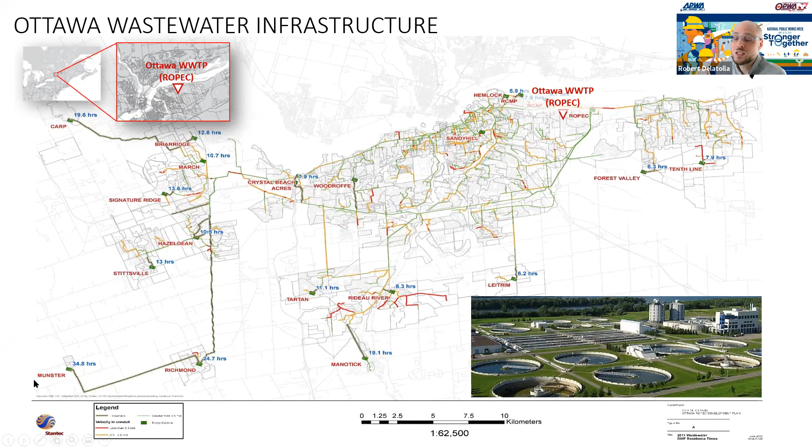Ottawa is about 1 million people. About 910,000 of that million are connected to the sewer system, with all of that wastewater flowing to one central wastewater treatment plant. So one sample from that plant allows us to get an idea of the signal of COVID in the wastewater for about 910,000 people. Still quite effective in that regard.

When we started this project, we had no idea if we'd be able to detect COVID, the virion or the genetic code of the virion, within the wastewater. So we looked at 5 different locations within the treatment system. We took 3 of those locations and fractionated them into suspended solids, filtered solids, and filtrate, trying to figure out exactly where we could find the signal of the virus.

We eventually figured out that the viral signal that's fecally shed ends up partitioning to the primary sludge. That's where we ended up looking for the virus within the wastewater treatment plant.

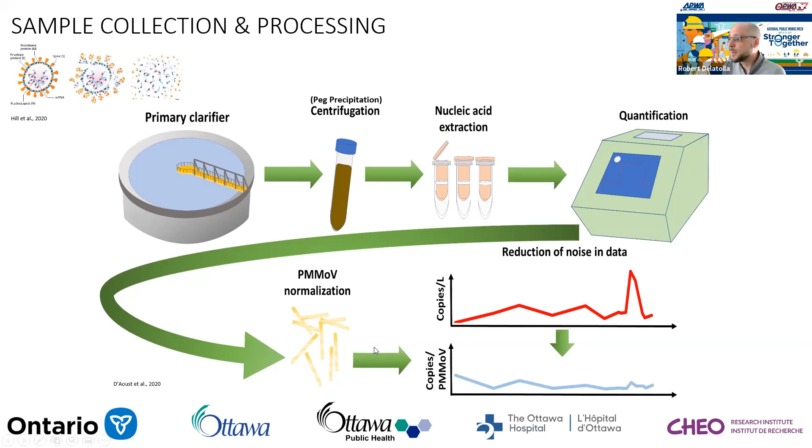Back in April and May 2020, during those early days in the pandemic here in Ottawa, there wasn't a whole lot of testing rolled out yet. So the number of new daily cases, the metric we're used to seeing on the news, wasn't very reliable because there simply wasn't enough testing going on. At that time, the public health unit was leaning on percent positivity, so that's what I have graphed here for you today.

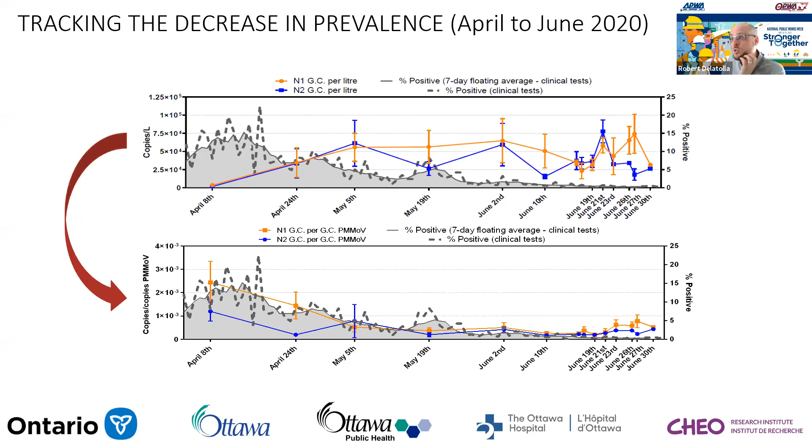But we only saw the clinical case numbers really increase on July 19th, two days later. So we started to learn at that point that this is our first indicator that wastewater testing might be an early detection system compared to clinical testing. Everybody fecally sheds, people don't have to go get tested, it's an involuntary deposit, and ultimately you could fecally shed before you really start feeling sick and think, okay, maybe I should go get tested.

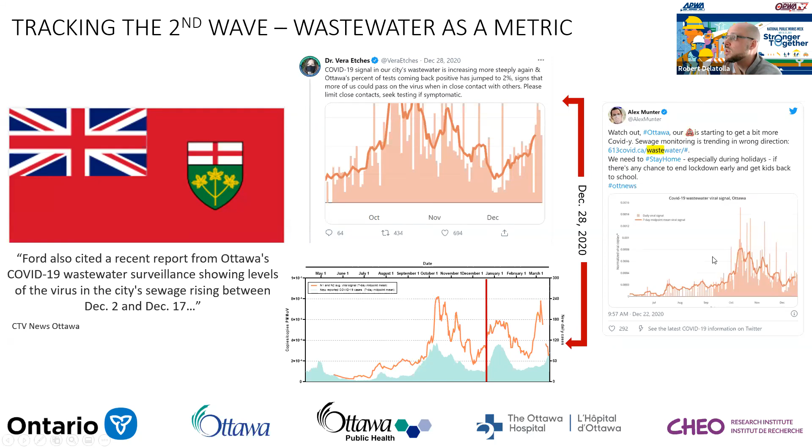The wastewater data has also been used quite a bit by Vera Etches and her team. Vera is fantastic, we're so grateful for her in Ottawa. She's the lead medical officer in Ottawa. Here's a tweet of hers asking for restraint from the public and showing the wastewater data increasing. Alex Munter, the CEO of CHEO, is also seen here tweeting the wastewater data, showing it going up and asking people to be cautious in their activities.

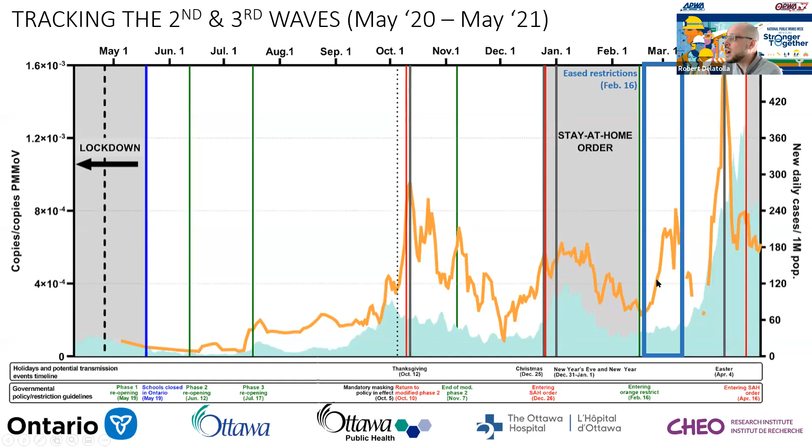A third example of when wastewater was used for public health is more recently, from end of February to March. And again it's the same story: the clinical test data wasn't really ramping up, the number of new cases per day, while the wastewater was really rising. Once again that data was used by Vera Etches and Ottawa Public Health to ask for increased social distancing and to inform the public that maybe there is more transmission, more community spread. Ottawa Public Health has a great Twitter feed, and they were asking people to be diligent given the increase in the wastewater at that point too.

One other aspect of our work here in Ottawa is that we were fortunate to work with Ottawa Public Health and be able to put that information online. They've been very generous to inform the public and show that data, linked to 613covid.ca - you could go check that out. There's somewhere between 1,000 to 2,000 views a day of the wastewater data in Ottawa, and it's being viewed all over the world, which we think is great. It helps promote and push the science, but also inform people about what's happening within the community.

Since we've been working on this project for over a year, we've also moved beyond just the wastewater treatment plant in Ottawa. We're testing 3 specific communities in Ottawa, and we're testing 2 locations at the University of Ottawa campus, in order to disseminate information and try to catch trends within certain hotspots, particularly within the community.

Another point we've been working on is the variants. We're hearing so much about the variants of concern, and this is very concerning. The first variant of concern we worked on was B117, the UK variant. We were fortunate in Ottawa and at CHEO to actually develop the assay to measure B117 within the wastewater, and that assay is now being used all throughout Canada.

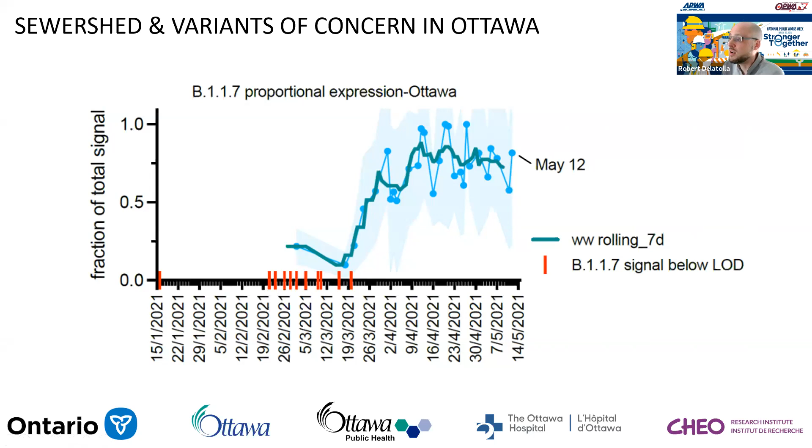So with that, I just want to thank OPWA one more time for the opportunity to come and speak with everybody today, and again to thank our partners. This is really collaborative work - because of the City of Ottawa, their whole team at the wastewater treatment plant, everybody on the sewer team, and also public health. Thanks also to the province, which came in January and funded this project, bringing $12.2 million through the MECP to fund this all across Ontario.

So I think hopefully you'll hear more and more about wastewater testing. There are now 13 different universities doing this, and we're doing over 120 different sites. So very happy, and hopefully it's going to make a difference and build a tool that will help keep us healthier and safer in the future. So thanks again.

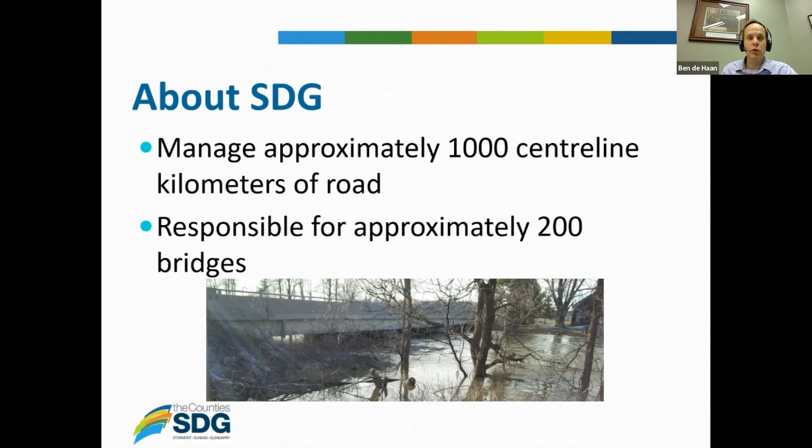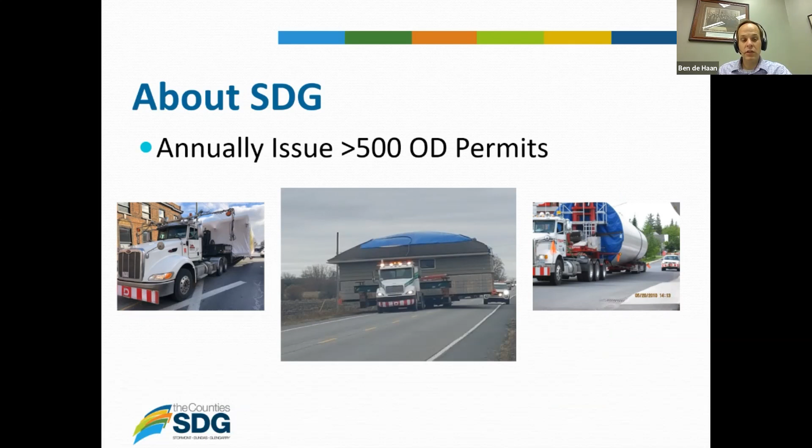As Arup mentioned, the county manages about 1,000 centerline kilometers of roads. We have about 200 bridges. And one of the big parts of our job is issuing permits. We issue about 500 over-dimensional permits, so that's anything above and beyond the requirements or what's allowed in the Highway Traffic Act. That just goes to show you that safely and efficiently moving goods is a big part of the service we provide to the people using our roads.

So about me, I'm the county engineer. I've been the county engineer since 2009. That's me doing some multitasking at my desk.

My claim to fame, according to the editorials in the newspapers, is I'm the roundabout king, because since my time here, we've implemented several roundabout projects, 3 to date, with a 4th one, which is out to tender right now. So for all the contractors listening in, I'd encourage you to go on Biddingo and take a look at that project. We'd love to get a bunch of bids for construction this summer.

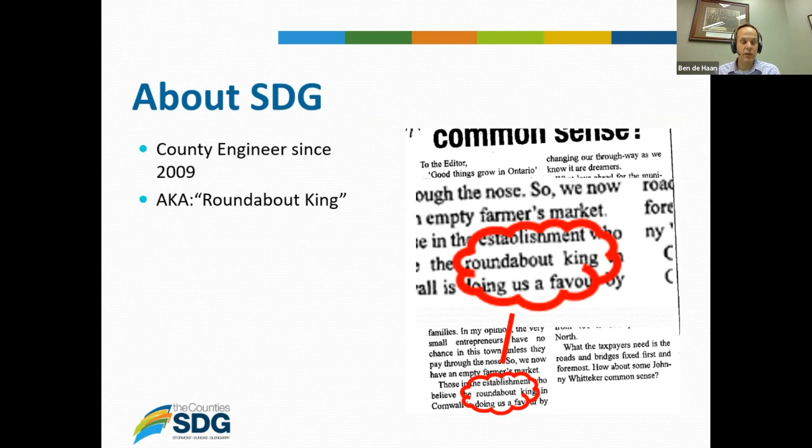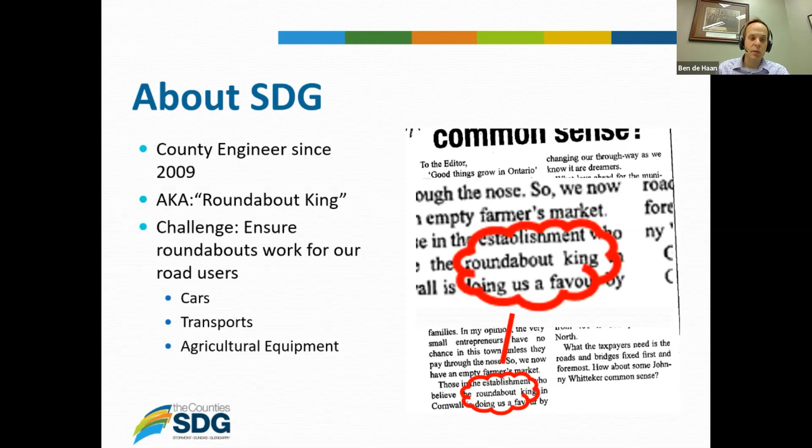We've been converting conventional signalized intersections, or intersections of concern, to roundabouts for various reasons, and that's really what I'm going to be discussing today. The challenge we've faced in doing that work is making sure those roundabouts work for all of our road users. So in the design, we're talking about the cars that use it, the commercial equipment that uses it, the occasional agricultural equipment, as well as the cyclists and pedestrians and other users.

The first project I want to talk about is the Iroquois Roundabout, and this is the first roundabout that was constructed here in SDG. The site itself, this slide gives you an overview of the project. It was located at the intersection of County Road 1 and County Road 2. We have about 15% truck traffic going through this intersection, so it's a higher amount of truck traffic.

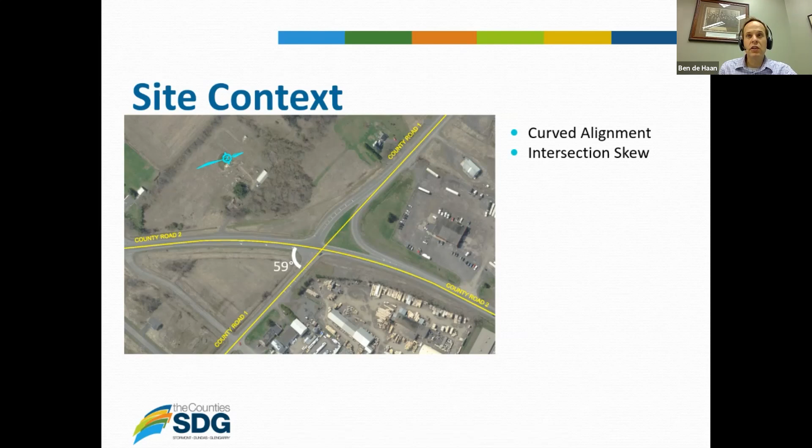The intersection itself, you can see County Road 2 is on a curved alignment, and that was why we actually looked at this intersection for a roundabout. We had a high incidence of accidents as a result of that curved alignment and some of the geometry and visibility there. The intersection was slightly skewed as well, approximately 59 degrees.

You could see that on County Road 1, we had tried to do some realignment to try and square it up a little bit better. County Road 2 is a through road here, and County Road 1 was stop controlled prior to the implementation of the intersection. We had sufficient right of way, so we were lucky in that respect. We didn't have to worry about property acquisition because of the large nature of the property.

But we did have some utility constraints. There were some high voltage wires there, but fortunately, the way the design panned out, we didn't have to do any relocation of that. One of the big considerations here, of course, is the truck traffic and the high percentage of trucks going through this intersection — we had quite a bit of heavy vehicle generation in and around this area. There was a logistics company located in the northeast corner, and a manufacturing company and feed mill in the southeast corner, so a lot of trucks were coming from those sites.

And if you travel on County Road 2 westerly, it goes towards Cardinal, and there's a large corn starch manufacturing company there.

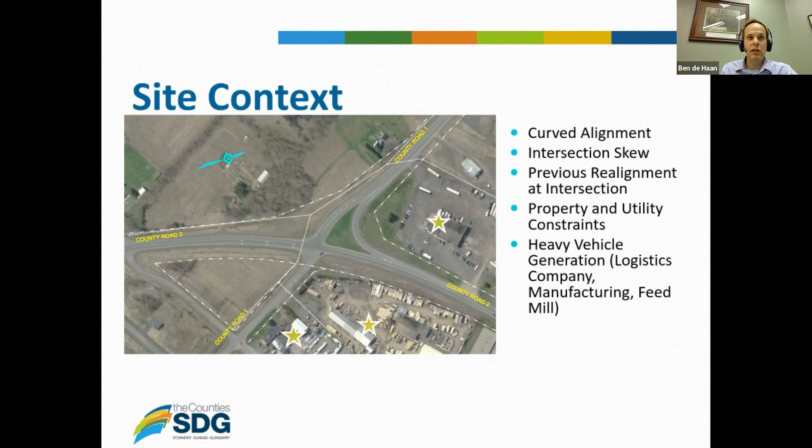A lot of trucks would come off of Highway 401, located just north of the intersection, and use County Road 2 to get to that location. Of course, the impact of the skew of the intersection has a big impact on how trucks can navigate it, and how Robinson approached their design.

When you look at a skewed intersection, that right-hand turn in that skew is the big problem. It really requires a turn path that's 40% wider than you'd need in a normal conventional intersection. So to accommodate that, designers would look at things like widening out your entry and those kinds of approaches. But we were concerned that doing so would create other safety issues. If you had that much asphalt to cover that whole turn path, you'd end up with a roundabout and an entry that looked like a 2-lane entry, and we certainly didn't want that.

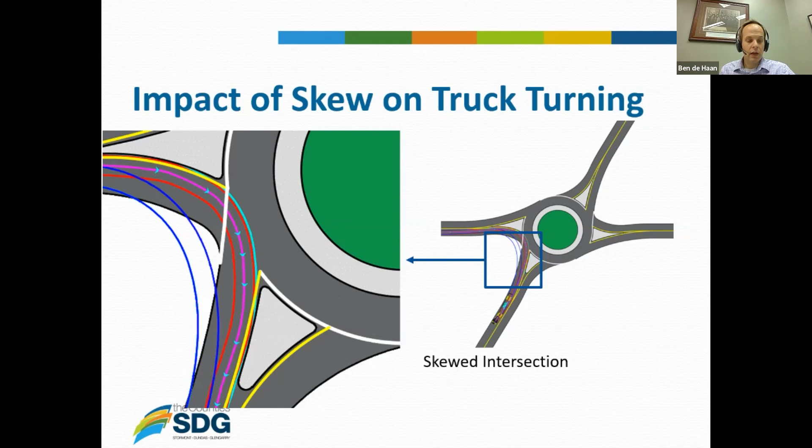So to Robinson's credit, they came up with a very elegant solution, which was to implement external aprons on this roundabout. You can see in the conceptual sketch as we were developing this design, those gray shaded areas are the external aprons that we thought would function as a way to accommodate the trucks without sacrificing the paved entry lane. The combination of the two is what trucks could use to actually navigate that intersection, because the predominant turn off of County Road 2 was both north and south in those directions. We wanted to make sure we could accommodate it, and that's what our design ended up with.

You can see in the design drawing for the intersection, the southwest and northeast corner, the final design for those tapers. Really those tapers were customized based on the turn paths using turning templates. Those kinds of tools were very useful and proved to be very useful as the design progressed.

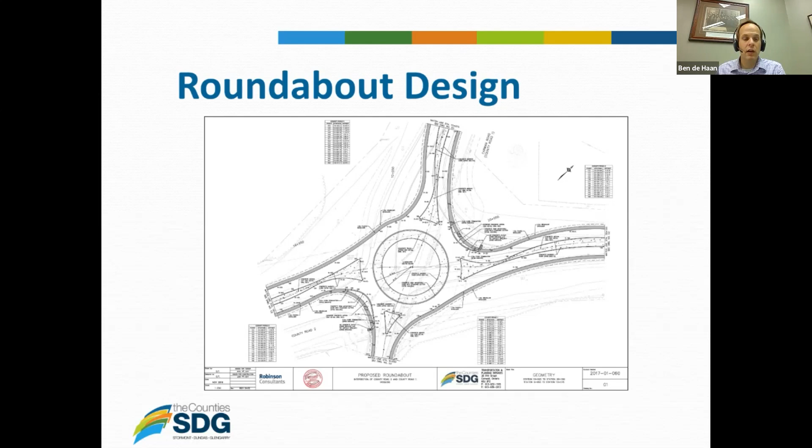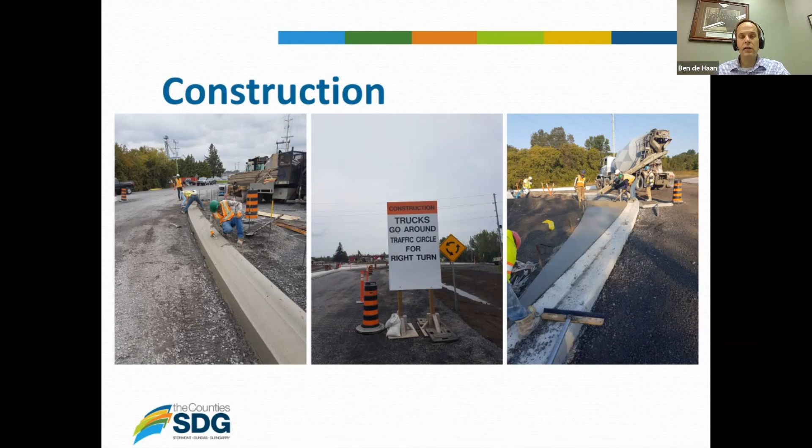It was finished in August 2017, and this is an aerial view of the intersection at a cost of about $1.2 million. I love this shot because you can really get a good feel for those aprons that were constructed as part of it and how they really blend into the overall finished product.

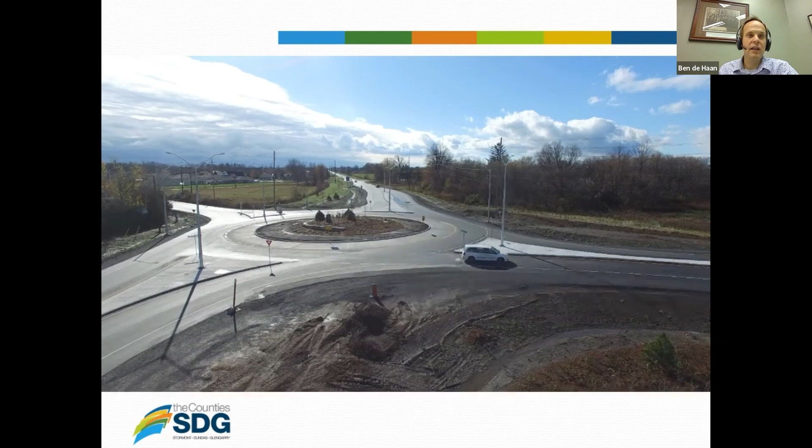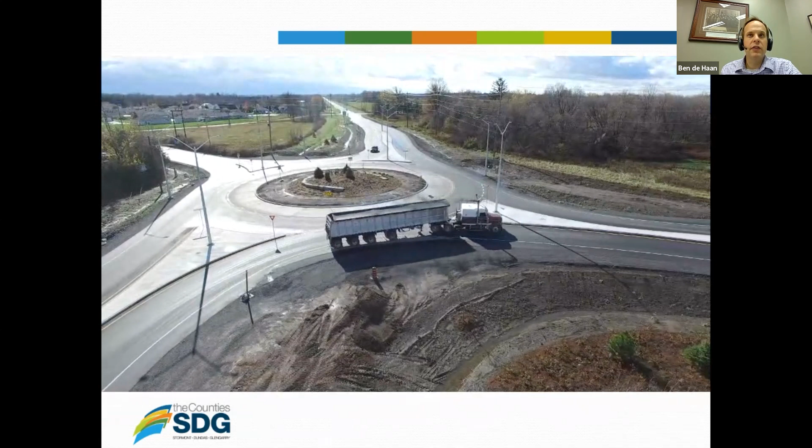While I was out there with the drone that day, I was lucky enough to capture a truck approaching the intersection. So here's how it actually ends up functioning. You can see the truck slows down enough to make a safe entry, makes full use of that apron, and continues on their way without needing to stop or create a very sharp turn. You can see how it helps.

At the end of the day, I do want to give credit to Robinson again - they won an award of excellence because of this design, a very prestigious award through the Consulting Engineers of Ontario. We were proud to be a part of this project.

The next project I want to talk about is in Long Sault, a little bit more in the south central part of the county along the St. Lawrence River. In Long Sault, we again had County Road 2, but a different design context - it's really right in the middle of the village, with separation between the village and the waterfront of the St. Lawrence River, and high potential for future development along the south end. County Road 2 was controlled by traffic signals at County Road 35.

At County Road 36, it was a stop control onto County Road 2, with residential, recreational, and institutional uses that are on County Road 36 or accessed through County Road 36.

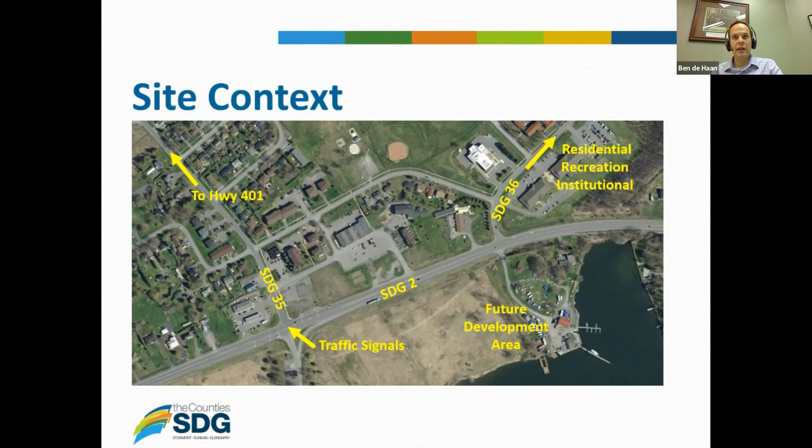Some site photos just to show you what the intersection and the road look like. You can see it's a very much County Road 2, which was a former highway, and it was a vehicular centric design back in the day. That was the main route between Montreal and Toronto, so much wider and more robust design than it needed to be based on the traffic counts. We have about 10% truck traffic there.

Whenever we were starting this project, we were approaching the end of the service life for the curbs and medians, and we took a look at the overall approach for this project and what it means for the community. That's why we landed on redoing the cross section to a more urban design that incorporated separated medians to help with traffic calming and implementation of roundabouts. So it was more a community centric approach to why we wanted to do this at the end of the service life, rather than a safety concern.

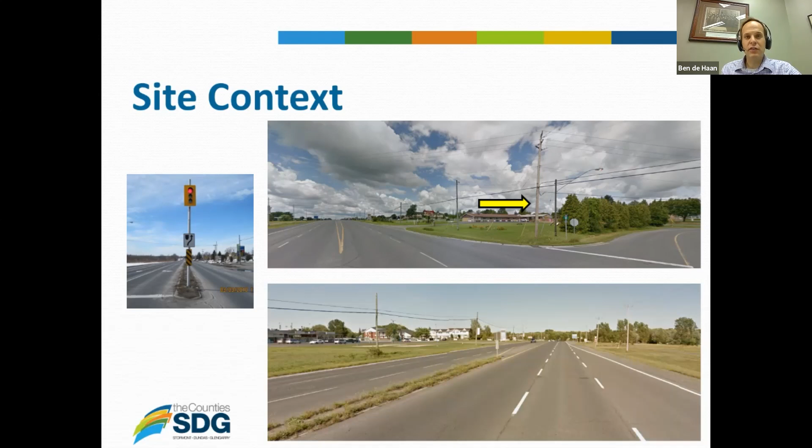I do want to point out, just for context as well, this pole here. This pole was the bane of my existence through this whole project, so anytime I can vent about it, I try to do that.

The design itself is very conventional. We made sure we had the separated medians and a lot of landscaping elements. Trucks and commercial traffic were designed for and thought about throughout, as well as pedestrians and cyclists.

Yeah, and I do want to point out that's where the pole was in the final design. We knew that it was going to be a problem for us, which is why we pre-consulted with the electrical authority well in advance of the work, with the intention of making sure it was relocated before we started.

One nice thing with the design of these intersections and roundabouts is the predominant truck movement was north to south. We have access to the 401 at County Road 35, going north from this intersection. And County Road 2 is an EDR, an emergency detour route for the 401.

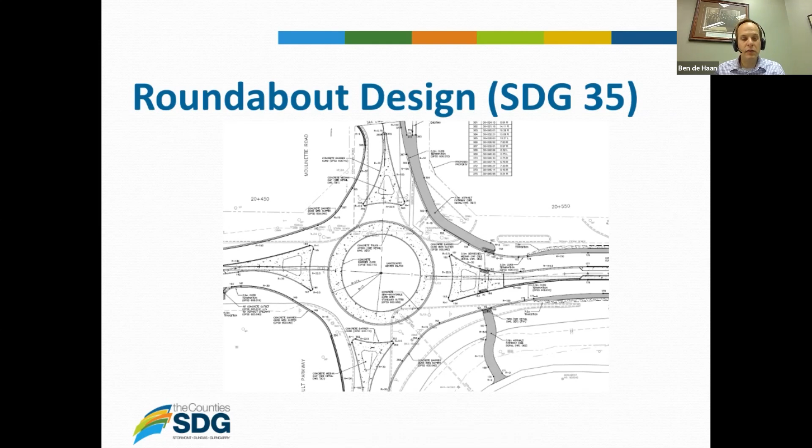But as the design progressed, we confirmed our truck turns through all the quadrants. It was checked, all the movements were checked with templates. And again, we shared some of those lessons learned from Iroquois on how to stage it to make it less painful for traffic to move through it.

Construction started after the long weekend, and Cornwall Gravel was our contractor here. We were able to maintain two lanes of traffic throughout the whole project, which is one of the benefits of that large platform I showed you in the existing drawings, since that large existing roadway platform gave us a lot of flexibility. We reused what we could, so a lot of the storm infrastructure, some recycling of asphalt, and our price for this project was $2.2 million.

Of course, every construction project comes with challenges, and here's an aerial view of a 401 detour because of an accident, with our contractor having to work with 401 traffic operating through the middle of their construction zone. That was certainly a challenge.

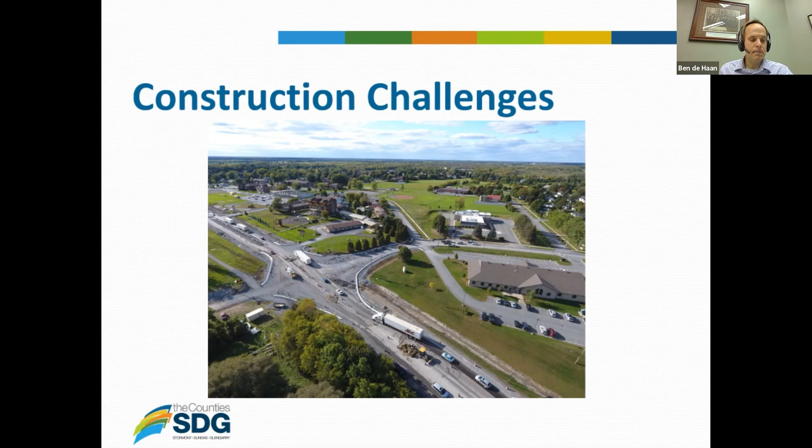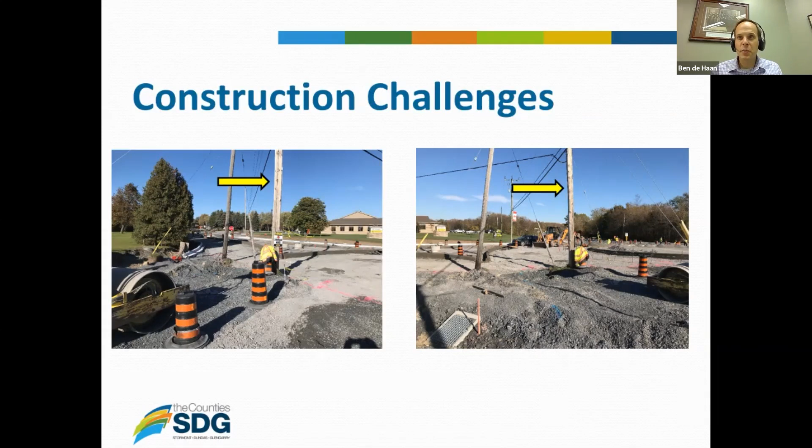And I know I mentioned this stinking hydro pole. Here it is again. You can see how it's right in the way of the work and still in our way. Fortunately, we were able to get it out of the way just before we opened, but it did require us to detour onto local roadways since it was a problem for us in finishing the work. I'm still having nightmares about this hydro pole.

The last challenge we had in the construction of this project was just that final connection with hydro. We had all the poles and all the lights ready to go, but it did take a significant amount of time before we were able to get those final connections. But we did, and the end result was fantastic.

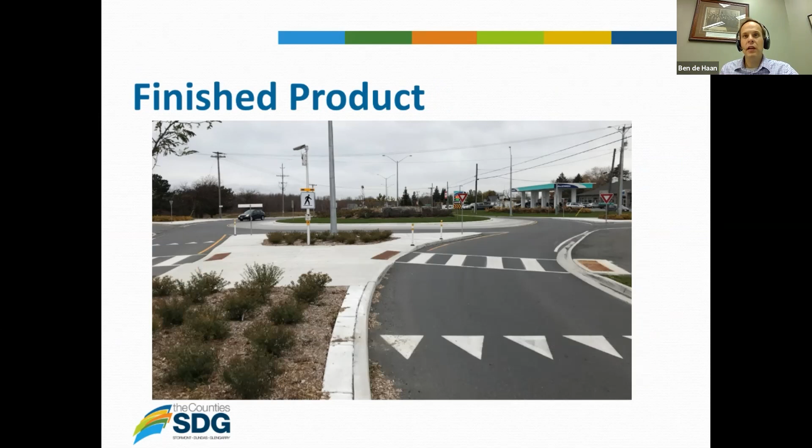Here it is. You can see this is the intersection of County Road 35, Moulinette, and County Road 2. Again, you can kind of see in the aprons how the truck traffic is tracking up onto those mountable aprons. We've accommodated pedestrians in every way we can, as well as cyclists, so it's AODA compliant, and we've got pedestrian crossings.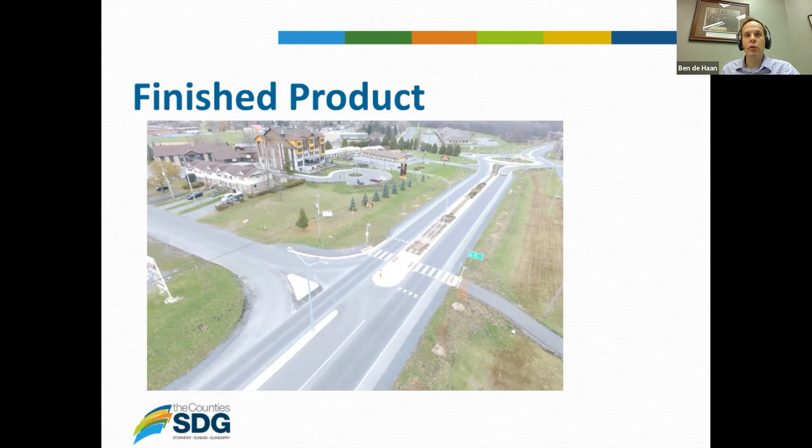We've improved access to the Long Sault Plaza and improved the landscaping, creating a beautiful section of roadway. That's what our final landscaping at the roundabout at County Road 36 and County Road 2 looks like.

You may ask, how does it work with large commercial vehicles? Back to the over-dimensional stuff, absolutely fine. This load was approximately 12 meters wide, roughly. It was a mover that was moving a house. In the design and actual maintenance and operation of this, we can accommodate fairly significant loads. We've made use of removable signs - you can see the yield sign, if you look closely, laying down here. We can remove the base and accommodate loads like this. This was an example where we just had the OPP hold the roundabout, and the house was able to move right through it.

So, final thoughts. I've been to a lot of public meetings about roundabouts, and the most important thing is to highlight the benefits to the users. I haven't been to one public meeting where those involved in commercial activities haven't said you've got to make sure you think about trucks. So it's important to highlight there are less delays and stop-idle times with these roundabouts. Now that we have experience with them and can show what our design standard looks like, I think it helps mitigate some of those concerns. They're much safer than a conventional intersection, and the statistics since we've implemented these roundabouts demonstrate that.

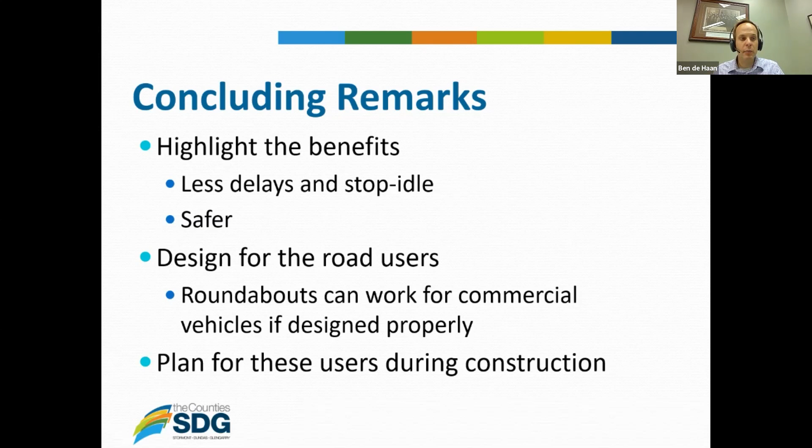You should be designing for the road users - think about the people using it and how you can accommodate them, and make sure you check that those vehicles and users can use it, and plan for them during construction. Make sure you've got strategies to accommodate things that might arise, like a telephone pole in your way. And with that, I'll stop.

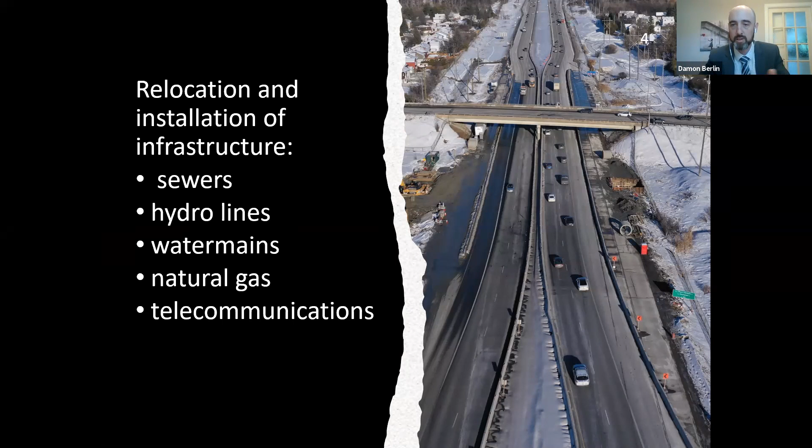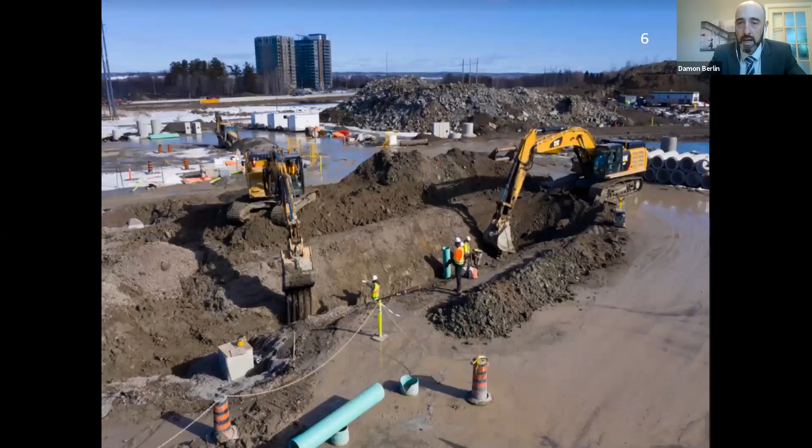Another key milestone in 2020 in the east was the construction start of the new 174 median rail bridge. In order to connect trains from the existing transit alignment on the north side of the OR 174 into the median itself, a new dedicated rail bridge is being constructed approximately 800 meters to the east of OR 174 and Blair Road interchange. From there, trains will travel east in the median of the OR 174 to the final stop at Trim Road, where we're renovating the existing OC Transpo Park and Ride facility. We're also building future north and south ramps, required to accommodate the realignment of Trim Road and the construction of the future Trim Station.

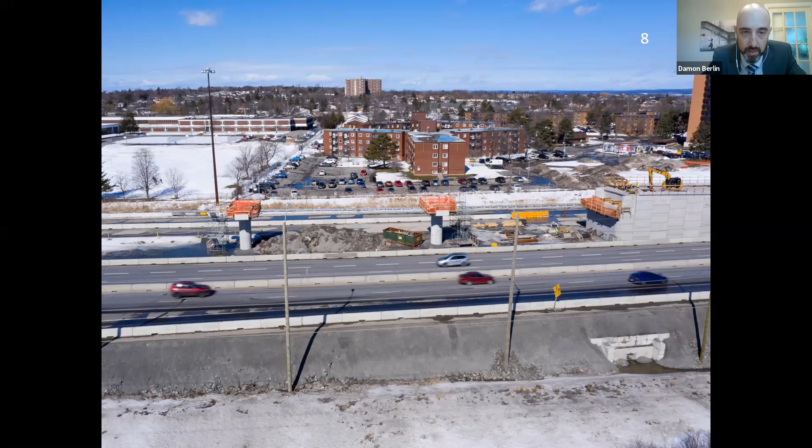This is a side view of the median rail bridge that began during the winter we've just recently said goodbye to. And some closer activities as they were preparing that in the winter. You can see here just the progress that was made.

Recently the construction team achieved a key milestone with the erection of the girders: 21 girders installed, representing 1,005 metric tons in total, with a total bridge span of 242 meters. It took 4 nights to install, all while minimizing disruption to motorists. Not many people are on the road at that time. The bridge is to be completed this summer.

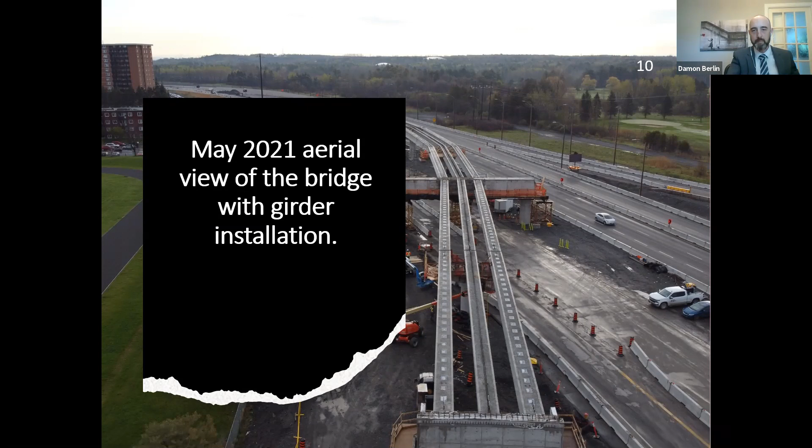A nice profile shot of the girder installations, looking really nice there.

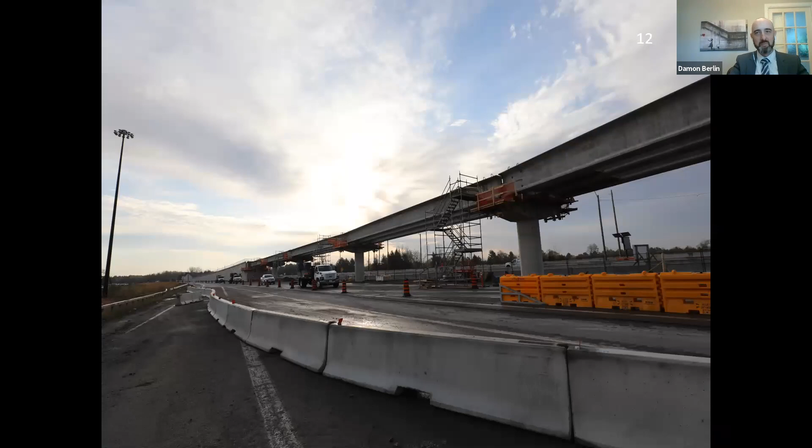Now I want to talk about the demolition of the Montreal Road interchange bridges, because as we relocate and renew infrastructure utilities, we also need to remove and rebuild some bridges. Over the course of the last year, OR 174 lanes were shifted, and 2 new bridges had to be built at the OR 174 Montreal Road interchange to create enough space which would allow work for the guideway and for the dedicated construction of the rail to begin.

So much of this project is move before you can do. And as much as I'm just going to sidetrack here, because I do that a lot - we are converting a bus rapid transit system, or to anyone from Ottawa, our transitway system. This is the first conversion in North America. Well, it's not entirely true - there was a small section of the Canada Line in Vancouver, but let's pretend that didn't happen.

We're dedicating 44 kilometers of rail here. And we are first creating the detours for the buses to maintain service delivery, so that we can then build the project. So buses, utilities, bridges, you name it - we're moving it, we're building it, we're moving it. Oh yeah, and now we're building it again.

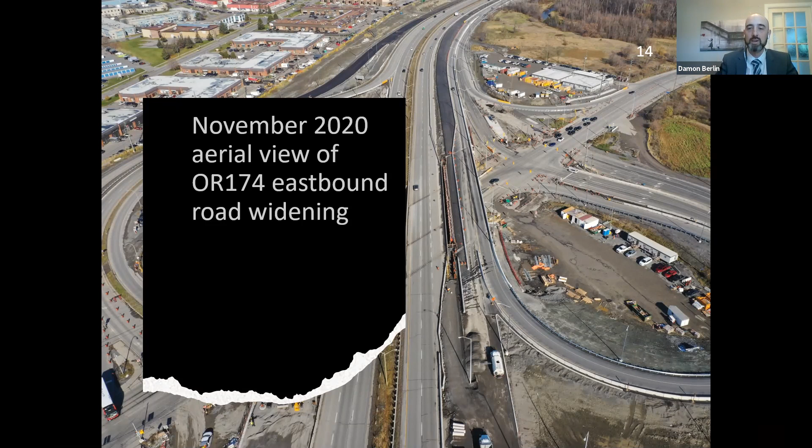As you can see, we do have - I'm pointing with my finger, I apologize - widening roadways and the confluence of interchanges, transit, a lot of competing interests in that area.

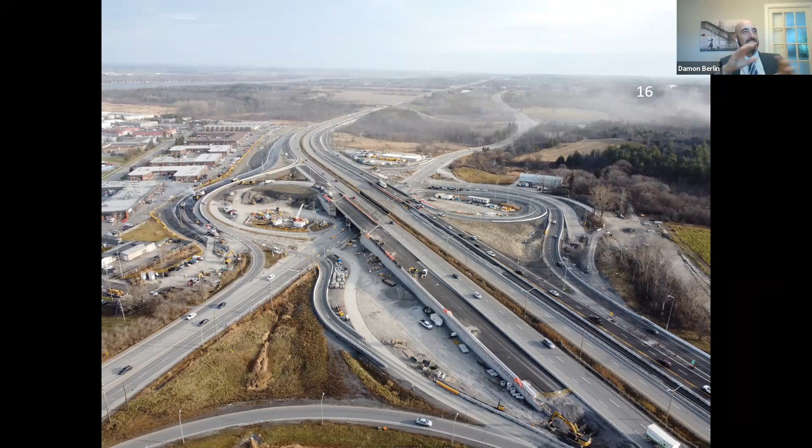A tremendous amount of meticulous planning ensured that the demolition of the Montreal Bridge was a success. This is a significant project milestone for the Stage 2 team. As you can imagine, this going wrong would have impacted so many people and resulted in the kind of negative press that the constructor and the city of Ottawa, the client, did not want. I think they proved very successful in their ability to plan and execute.

For 57 hours, beginning Friday night at 8 p.m., Montreal Road was completely closed beneath the OR 174 to vehicles, including OC Transpo buses, pedestrians, and cyclists. Crews operated various pieces of large construction equipment fitted with hydraulic hammers, buckets, forks, and shears, working around the clock to demolish it.

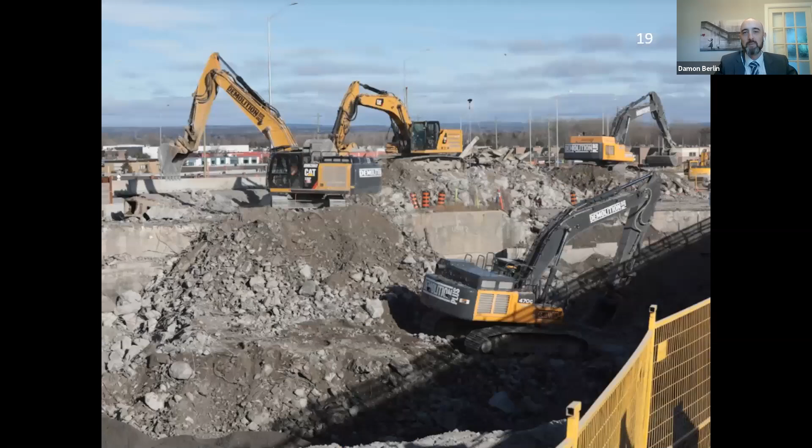1,456 cubic meters of concrete and 160 metric tons of steel. I like big numbers. When I would talk about the excavation of the downtown tunnel, those were always some giant numbers that we would relate to the size of Olympic swimming pools, or number of Olympic swimming pools.

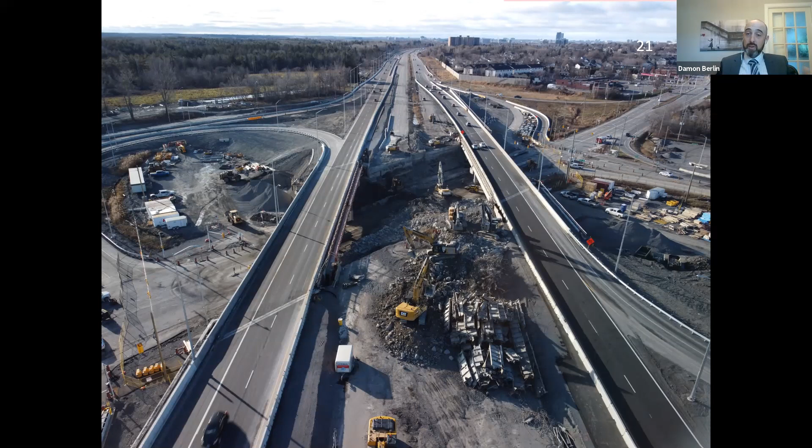Here you can see some images of the demolition, and you can understand and appreciate why Montreal Road had to be closed. Every detail was considered, including an OC Transpo shuttle service to ensure pedestrians and cyclists could get to the other side of the bridge along Montreal Road safely. As planned, Montreal Road was reopened to traffic and pedestrians at 5 a.m. Monday morning, and for some time after, concrete and steel debris from the demolition was safely hauled away. There were no safety issues at this site during that takedown.

I have a video I'd like to play. You've listened to me discuss Montreal Road, the removal of a bridge, the construction and the requirements and necessities. Now I'm going to show you why words are so undersold when it comes to a time-lapse video. So please enjoy this.

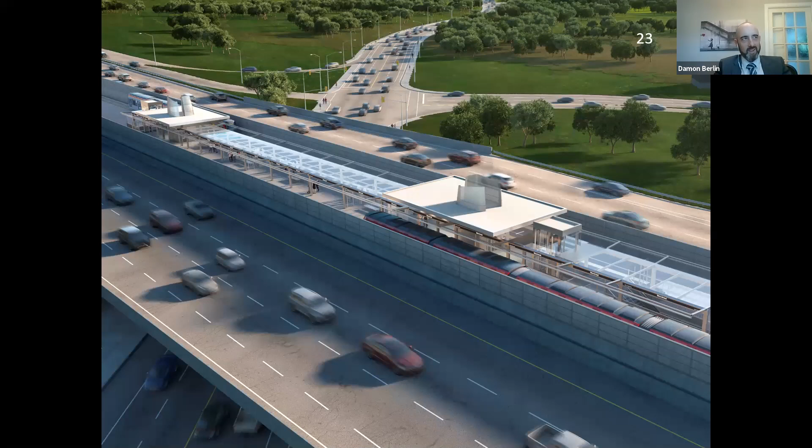Thank you for joining me on that wonderful time lapse. Now, as Ben said, it's very important to showcase the finished product, which allows people to remember what this is all about. In Ben's instance, I believe those projects are a year or two of construction, maybe less, whereas ours we're looking at 5 or 6 years, depending on the area being worked on.

Contractually speaking, the east is to achieve substantial completion of construction in 2024, and the west in 2025. And so this is the future Montreal Station.

As you can see, it is in the median of the OR 174, above Montreal Road. It will have 2 station entrances and 4 elevators. These are what denote the elevators — we have redundant elevators, so if there's 1, there's always 2, and in case of 2, then there's 4. That's to ensure that we don't end up in operations with an inability to get people accessibly to the station platforms.

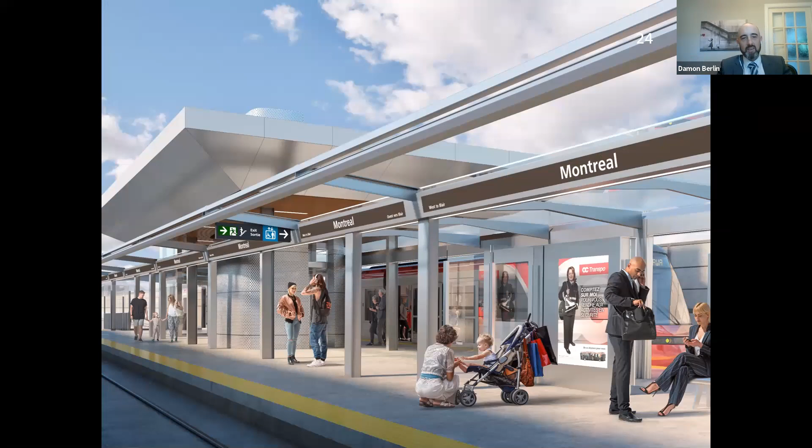This is a nice platform view, and this is one of the areas where the platforms are covered. That's not the case in all of our Stage 1 stations, which is a bit to the chagrin of many of the people who like to call and write.

Montreal Station construction is anticipated to begin in September 2021 and be completed in June 2023. As I mentioned, it will have 2 entrances with bus connections. These are the things that we just discussed.

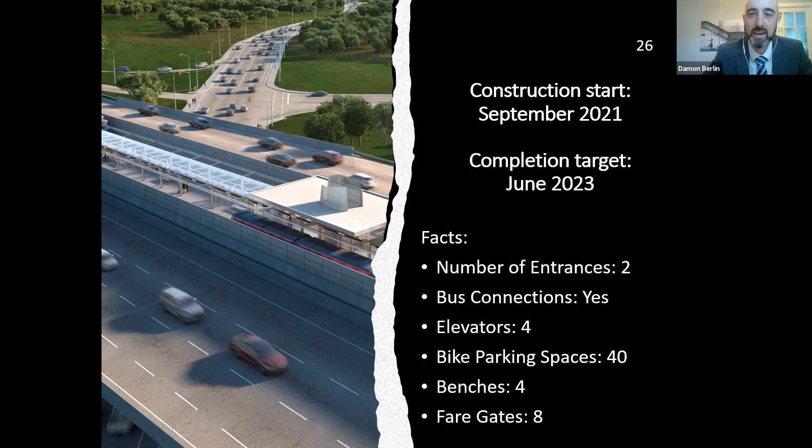Now I want to thank you very much for taking the time to join and listen. It's nice, actually, to speak to people who have a professional interest in the project and the construction versus individuals who are personally impacted by the construction. Two weeks ago, I gave two presentations to two different communities — one resulted in a veiled threat of violence, and the other resulted in a public message board seeking to have me fired. So I hope your questions are kinder, and I hope you've enjoyed what we've had to say today. Thank you.

Great, thank you, Damon. There's nothing like seeing concrete and girders and steel for public works professionals. So I'm pretty sure you're not going to get the kind of reception you talked about, which many of us have lived through having gone to public meetings. But anyways, I digress. I will ask Barb, we do have a number of questions here, so I'll ask Barb to go ahead and facilitate those questions.

Okay, so our first question is, what was the age of the old Montreal overpass? Was it close to life cycle or half cycle?

I'm sorry, I don't know the age of that piece of infrastructure, but it was in the way and had to go. We had bridges in stage 1 that weren't going to support the infrastructure down by Bayview Station that were required to be removed and then rebuilt. This one was in the way.

What I can do is I'd be more than happy to get the information. Not being an engineer, being stakeholder relations, I won't have a lot of the technical details you're probably looking for, but I can record the questions and share them with Megan, who's been my conduit for this presentation. That sounds great, thank you.

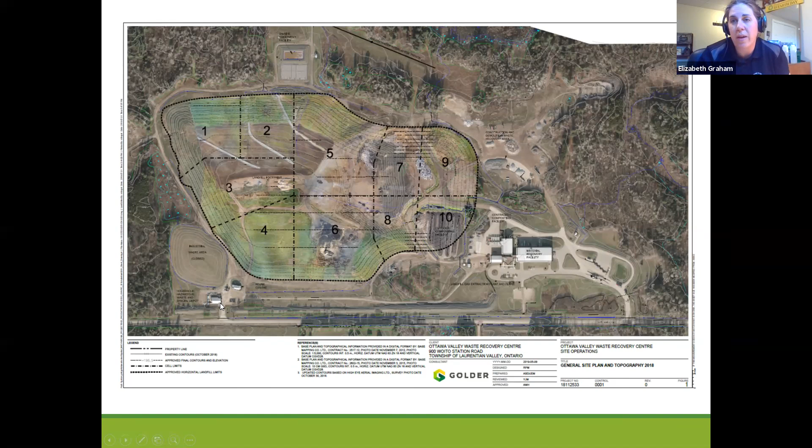So our waste management system for the curbside municipalities - 3 of our partners provide curbside collection through a contract they have directly with Miller Waste. It's bi-weekly collection: one week is garbage collection and yellow bin collection for bottles, cans, and metals and plastics, and the alternating week is blue box collection for paper and cardboard, and green cart collection for kitchen and yard waste.

The municipalities use large 240 liter carts. Our one municipality, North Algona Wilberforce, operates on a depot system, so residents bring material to central locations within that community. They have a series of roll-off bins to collect recycling and garbage, and they also collect kitchen organic waste using Molok containers.

If anyone's not familiar with those, the Molok containers are shown in this picture with the green lids. Those are cylinder type containers - the cylinders are actually 2/3 underground, and 1/3 of the bin is above ground. They have bear resistant lids, and we provide the collection service for these bins.

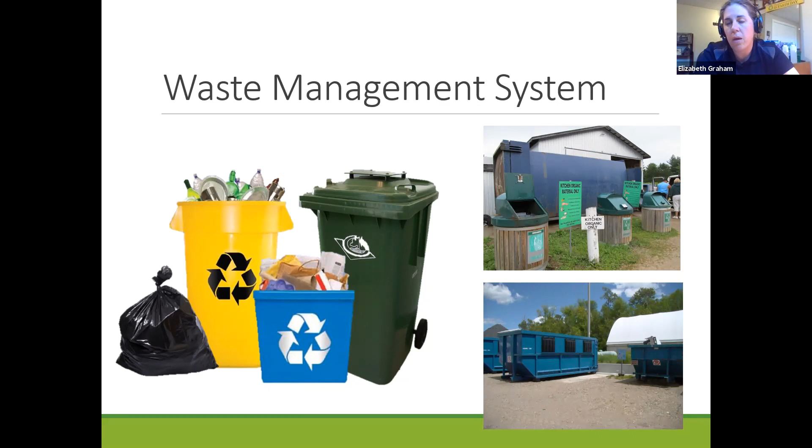We have a truck equipped with a crane unit, and the crane connects to the lids of the Molok containers, pulls the cylinder container out, positions it over the truck, you empty or open the bottom of the cylinder, material falls into the truck, and then you replace that cylinder back into the Moloch container. We also provide this collection service throughout Algonquin Park - they use the Molok containers for all of their waste streams along Highway 60 corridor, and we provide that collection for that program as well.

So material is all brought to the Ottawa Valley Waste Recovery Center for processing. We receive recycling within our 2-stream material recovery facility. This truck is emptying the container recycling - the glass, plastics, cans, bottles. Materials are sorted using 2 different conveyor sorting lines, and this image is showing the container recycling sorting line.

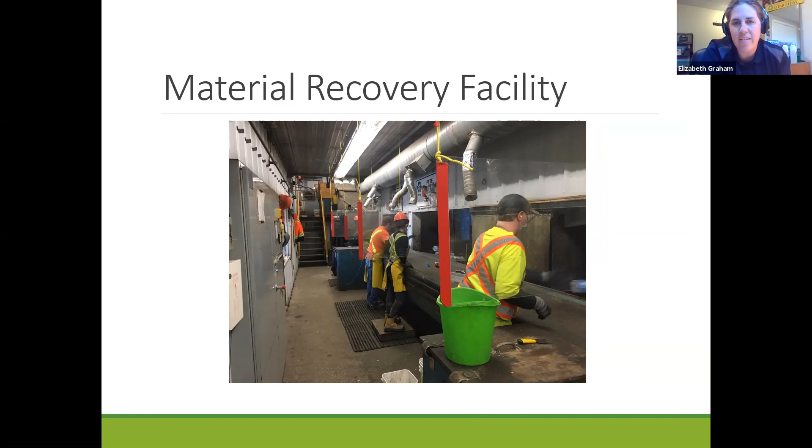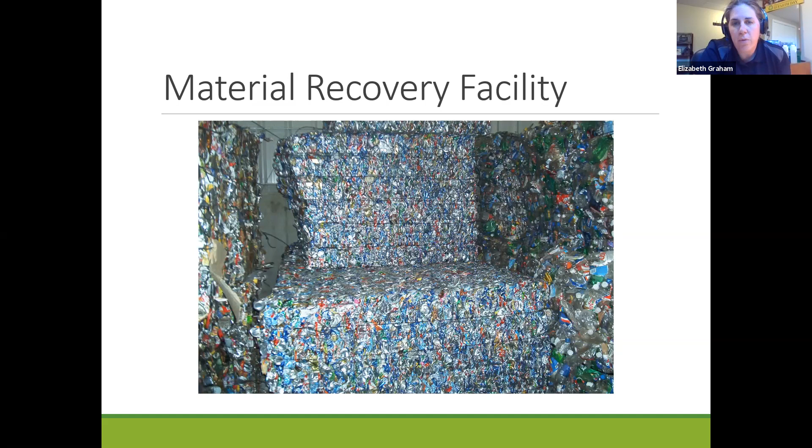Designated staff sort each material type - somebody's sorting out plastic bottles, somebody's sorting out milk cartons. We have a magnet that removes tin cans and an eddy current that removes aluminum cans. Once material is sorted, it's moved into a baler, and the baler makes these cubes of recycling, which we ship or sell off site to be processed into new goods.

Our in-vessel composting facility is mainly for composting of the green cart materials, the residential food and yard waste collected through the green cart program. We do have some commercial material that comes in, as I mentioned, Algonquin Park, and a few grocery stores and restaurants also bring kitchen waste to us. Material dumped inside our building - we have to do a pre-sort on the organic material to pick out non-compostable items, including plastics. We're a no plastics program, including biodegradable and compostable plastics - that's not permitted in our program.

Once material is sorted, it goes through a shredder, and then we load it into our mixer. The mixing process is just to get that right carbon-nitrogen ratio. From there, we load it into one of 11 in-vessel compost containers that we have. We circulate air through those materials, and we monitor the temperature and oxygen. It stays in there for about 2 weeks.

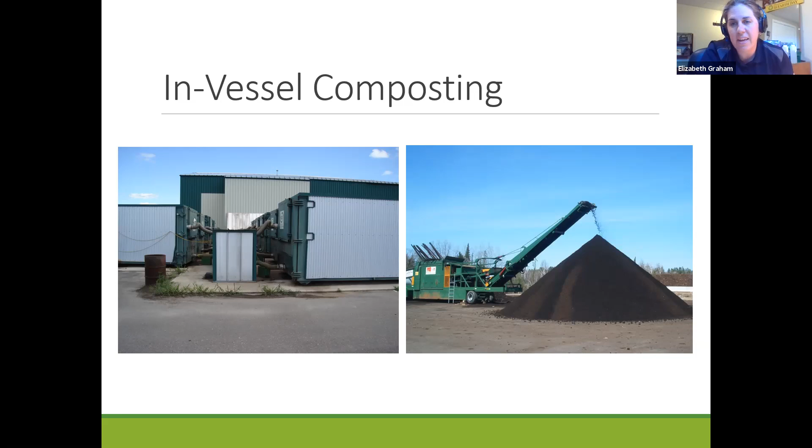Then we empty it out onto a paved area, our outdoor windrow composting area, and form them into windrows where they continue to compost, cure, and finish the composting process. We screen the material with a screener, and the finished product is made available for agricultural use. Interestingly, the green cart material compost we produce is really high in salt, so we make this primarily for use either on site for our landscaping needs, or for the agricultural community.

Our outdoor windrow composting area, as I mentioned, is a paved area, primarily for composting of leaf and yard waste. This material is usually collected in the spring and fall by the municipalities - residents put out bags and material in paper bags, or drop it off at our site for composting. We bring in a shredder or grinder to process this material, and it composts in windrows.

It composts for about 6 months, and then we screen it, and this is the product we make available to residents. They come in with their trucks or trailers and purchase this material in bulk. It's loose, and we sell it for $25 a cubic yard.

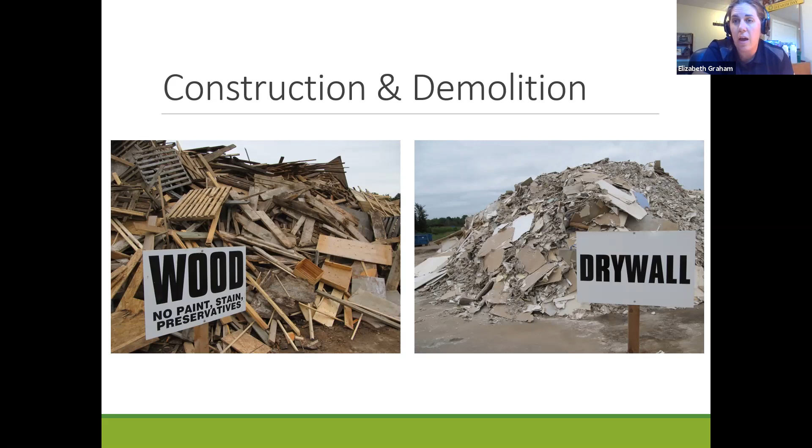Our construction and demolition area houses our wood waste, drywall, and shingles. There's also an area for the storage of tires and scrap metal, which are shipped off site for recycling. The wood waste and shingles are ground up, and drywall is screened and ground up, with what's left made available to the agricultural community as a soil amendment. Here's the grinding of the shingles and wood waste - we use these on-site applications as alternative daily cover at the landfill, and I'll talk more about that when I get into the landfill.

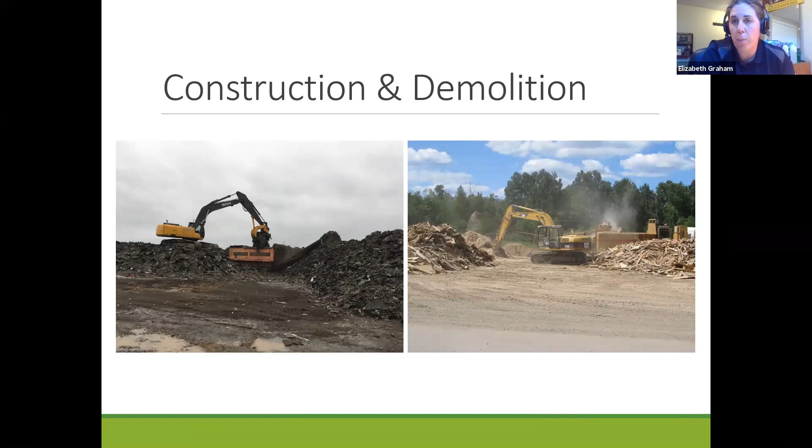Our electronic drop-off depot has small roll-off bins available for residents to drop off TVs, computers, and monitors. Those are shipped or picked up by a local processor who takes them to his warehouse just outside Pembroke, sorts them, and then ships them to a licensed electronics recycler.

We expect to reach capacity in 2023. The actual landfill site has been operating since 1977, and the group of municipalities took over operation in January 2002. Our leachate treatment facility has been operational since 2003, and our landfill gas collection system has been operational since 2009, with an expansion just last summer in 2020.

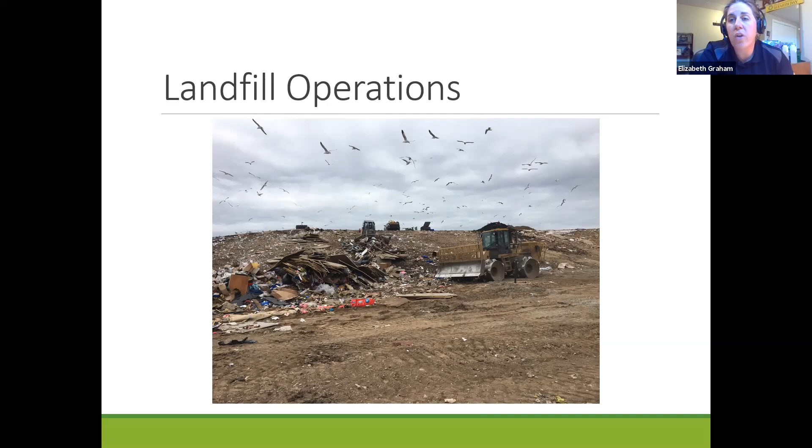We compact material with our landfill compactor and cover it daily, either using a tarping system, gravel we have on site, or alternative daily covers like ground-up shingles and wood waste. We also use bulky waste as alternative daily cover—this is material collected during spring and fall large item collections provided by the municipalities, like mattresses and couches. We grind that up and use it as alternative daily cover as well.

This is beneficial because it reduces the volume of those materials and makes them much easier to handle. If you've worked in municipal waste management or landfill operations, you know it's nearly impossible to compact and bury something like a mattress—it's really hard on the equipment and hard to manage. By grinding that bulky waste, we reduce the volume going into our landfill, while getting one more beneficial application out of it before it finishes its life there.

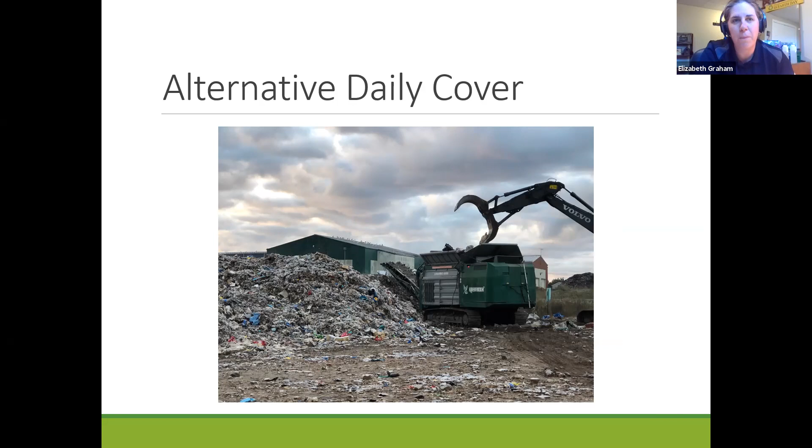Our landfill leachate treatment system collects surface and groundwater that's been impacted by landfill leachate. This is gathered through a groundwater interceptor trench and various collection points at the site. The water travels to the pumping station and is then pumped into the pond.

This settling or retention pond has a one million liter capacity. From the pond, it empties into an underground recirculation tank, and from there it's pumped into four different treatment cells, each performing a different function with different mediums—sand, gravel, and wood chips. Bacteria play a really important role in the treatment of the landfill leachate, and it's discharged from cell four into the natural wetland surrounding the site.

We found that the bacteria are very dependent on temperature, quite sensitive to it. We were having a hard time keeping the system operational in colder temperatures, especially in the spring when the runoff was quite cold from the snow melt.

So a few years ago, we purchased a wood burning outdoor furnace, and it heats water that heats a coil inserted into that recirculation tank. It increases the temperature of the water enough that the bacteria stay active all winter long, and we can handle the increased flows much better in the spring.

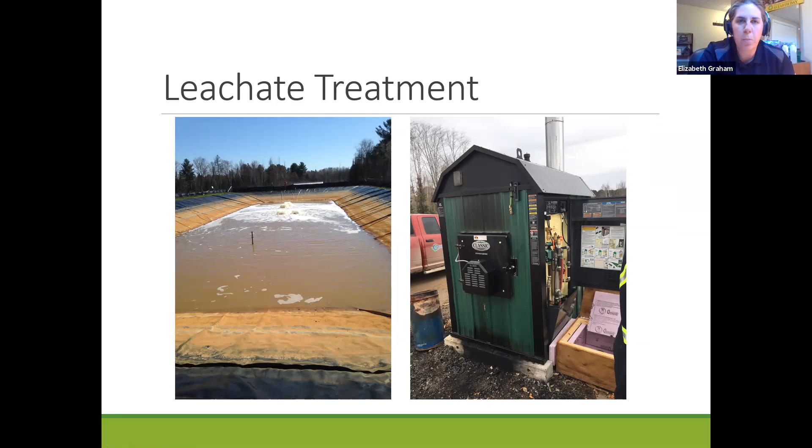We also collect landfill gas. We have 28 wells from the original installation, and as I mentioned, we expanded it last summer to add an additional 12 wells. The wells are drilled down into the garbage, into the landfill, and hooked up to a gas extraction plant that is on vacuum, which draws the gas out of the landfill.

Based on the technology that exists at this point, we just finished evaluating the feasibility of doing that when we added the additional 12 wells, and I think the payback time is 15 to 20 years. It's quite significant, which is hard for municipalities to put in place. So as technology changes, as the landfill grows and we add additional wells, it's possible that we will be able to use that as a heat source or electricity.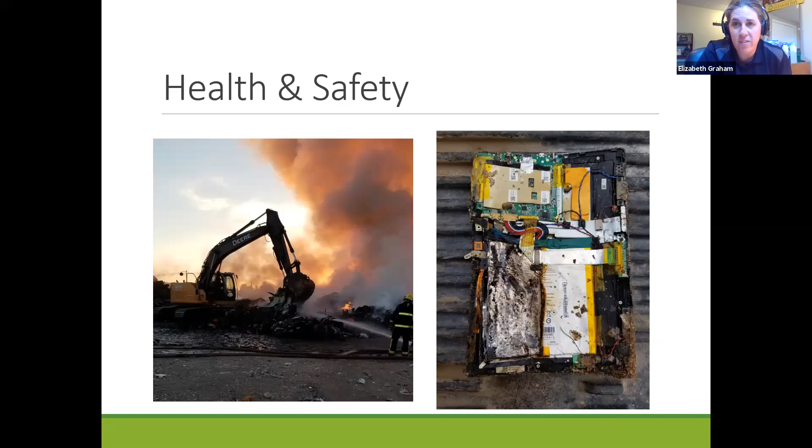So we were lucky in this instance with the large fire that there was very little equipment damage. Nobody was harmed, no building damage or anything, but it's a real concern for the community and the operation of the site. And of course, our programs only rely on what residents are putting into our bins.

And that's why public education is so important. This is what my focus really is, what I do on behalf of the municipalities at the center: public engagement, talking to your residents, reminding them constantly about the proper disposal of items, reminding them of the why.

We need to protect our employees. Just last week we had used gasoline in a 2-liter pop bottle come up on the recycling line. So it's a real hazard for the staff.